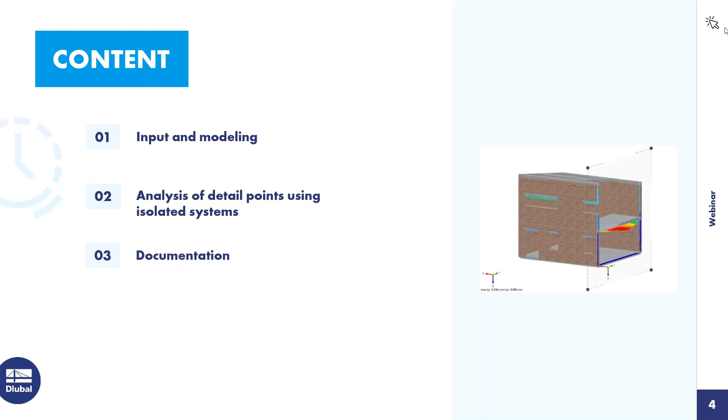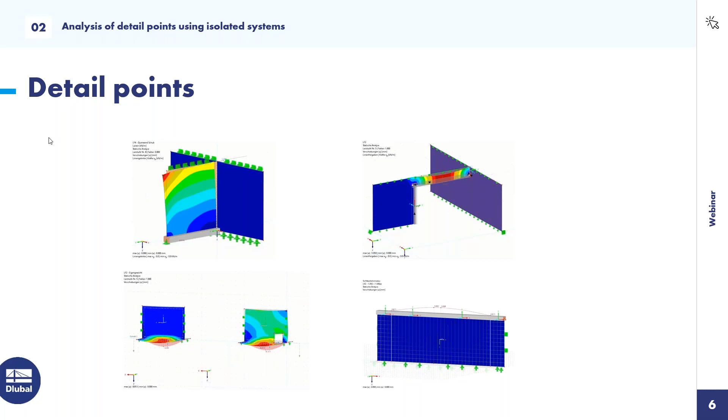Today I want to model a building from the beginning in RFEM. In the second part, I want to take a look at some detail points, especially connected to the masonry material. And in the last part, I want to show how you can document the results of the program. In the first part, we will insert a small building in RFEM, and I want to show you how to do it. In the second part, I have chosen some separate models where I have prepared things to take a look at some details. And as I said, the last part is the printout report.

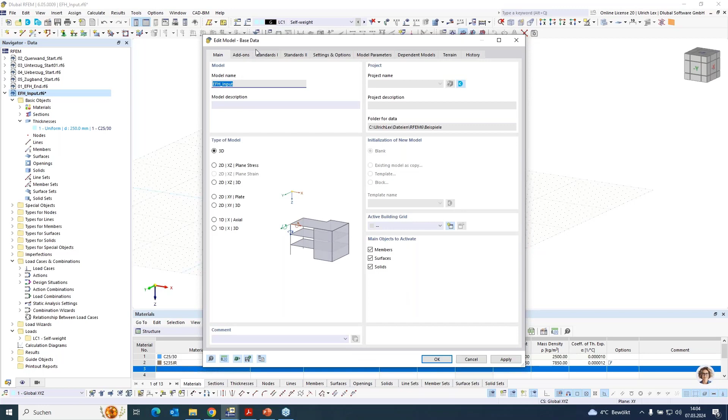So now I want to switch to the program. I have already created a new file, a new project in RFEM. It is important when you create a new project that when you want to use masonry, you check the add-on masonry. Otherwise, you cannot use the material model for masonry design.

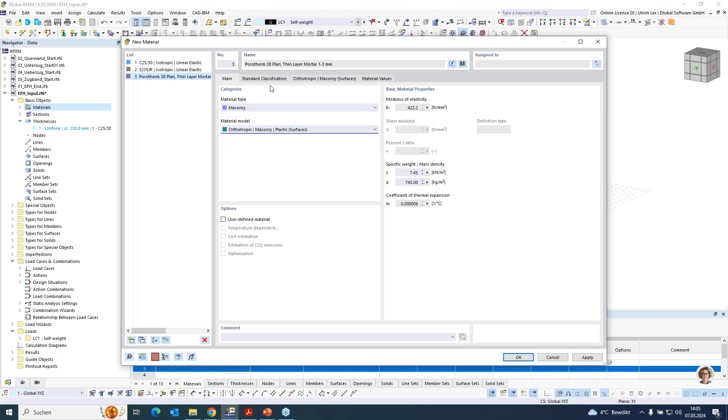So as a first part, I want to create a new material. You can use values from the database for material type masonry. Maybe you can choose one product you want, maybe Porotherm 38, and choose the material model, the orthotropic masonry plastic. If some products are not available in the database, you can also insert them manually.

In this tab, standard classification, you can choose the grouping of your product. You can choose the mortar you used. You have to insert the dimensions of the stone and the compressive strength. With all these values, RFEM automatically computes the data needed for the material model, such as the module of elasticity, the shear modulus, the allowable or ultimate compressive strength, or the ultimate tensile strength.

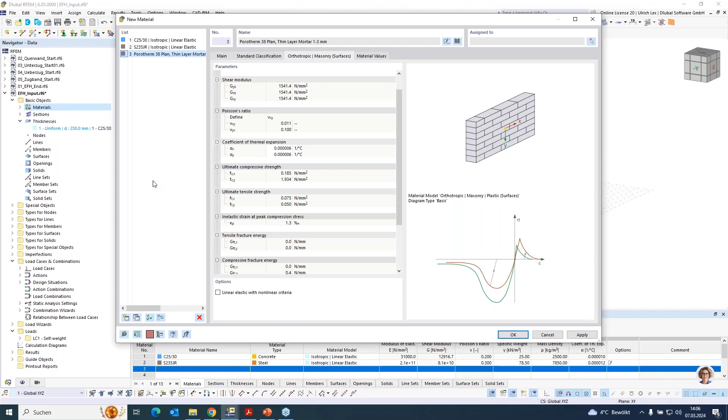So I want to create now a second material, maybe for the inner wall. It's the same as before - choose one product, maybe this Porotherm 17-50, and confirm with OK. The second thing I want to do is to create a thickness.

All surfaces need a thickness. The first thickness is already in, it's 250 millimeters with concrete for the foundation maybe. The second thickness I will create is 200 millimeters for the concrete slab. The third thickness uses our masonry material, 380 millimeters. And the fourth thickness uses the material for the inner walls with thickness 170 millimeters.

If I have done this, then I can start with the modeling. Here I have a building with the dimensions 7 by 9 meters. I use my grid points to create the first floor, 7 by 9 meters.

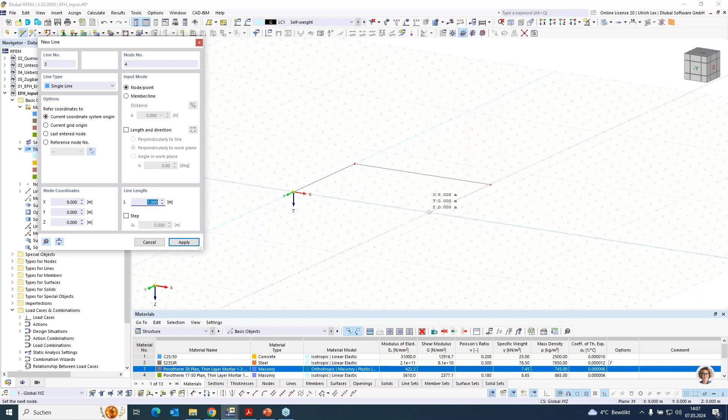I can here assign directly with this select boundary my foundation plate, thickness 250 millimeters concrete. Okay, and choose the lines.

So in the second part, I want to change my work plane and create a new surface. I want to choose now the thickness for the outer wall, with a height of 3 meters.

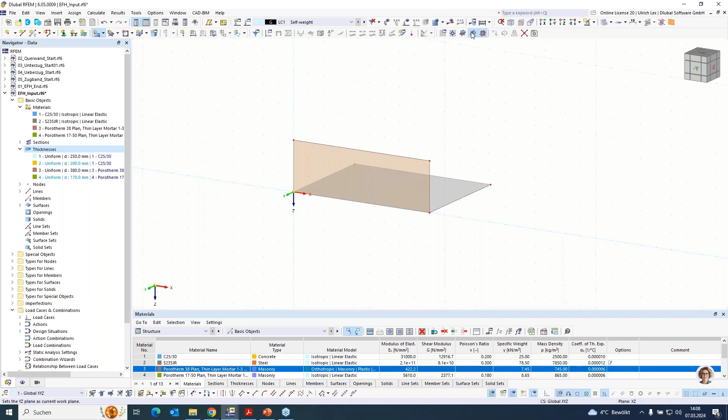I can change my work plane and create the second walls. Now I can directly copy these walls, and the first things are done.

Now I want to create the first concrete slab. Okay, and choose the outer lines.

So the second floor will be in the front a height of 4 meters, and in the back, a height of 3 meters.

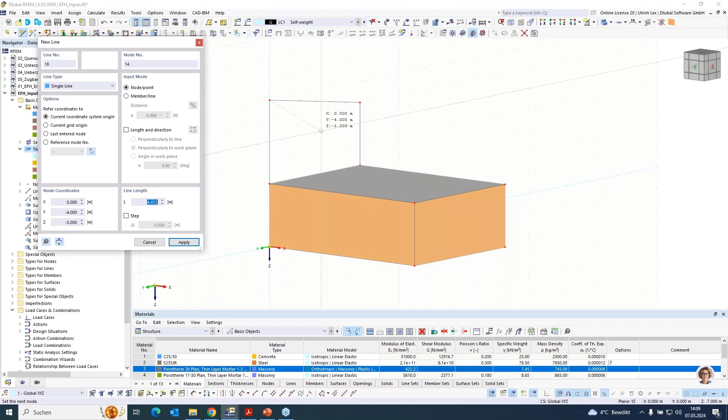As I did before, I can use select boundary with 360 millimeters, select and copy the surface, and at the end, the wall in the front and at the back.

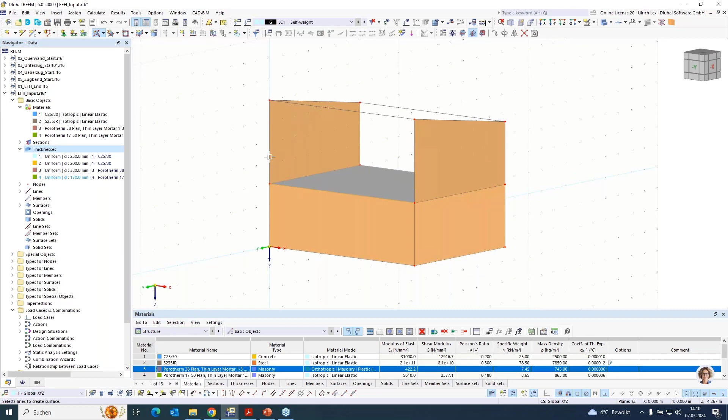Choose all these lines, turn around it, and choose the rest of the lines.

Okay, now I want to create my inner walls. There I select only the ground floor, and change my working plane.

And start to create the lines for the inner walls: 1, 2, 3, and 4 meters. My grid has a spacing of 1 meter, so I can use it directly for my modeling.

Change my working plane, and just copy the lines to these points.

So the second wall is in the second floor. I cancel my visibility mode, and create new lines here.

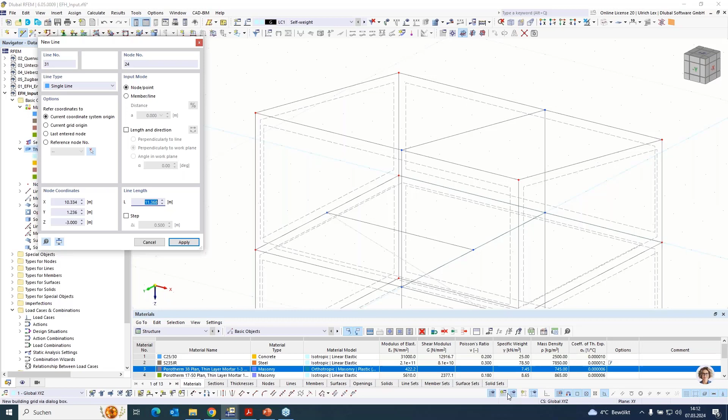Here you can see when I cross the line, then one point is caught automatically. This can be set in the detailed setting for catching the lines.

So now I have created all lines for the inner walls. Then I want to choose select boundary for creating a surface, choose my thickness from the inner walls - the material is automatically changed - and choose here my walls.

Here, and the third one. So now all my walls are created.

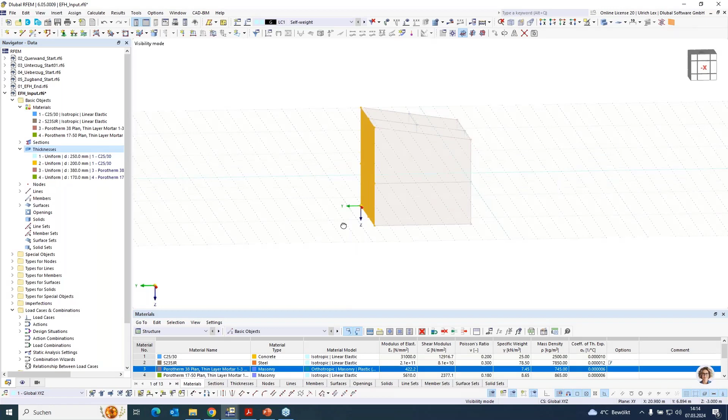As the next part, I want to create some openings like a window or a door. I select again my wall in the front, change my work plane in this plane I want to work, and change my grid point spacing, dividing the space 2 times.

Now I can use the option to create a new opening with 250 high and 150 width. I create a new window.

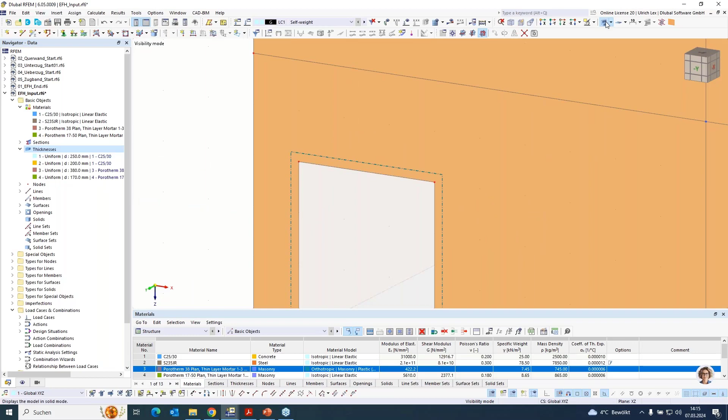Here it's one. I just want to change it to 2.50 meters, and create a window with 1 meter to 150.

The same maybe in this part, and the same in the second floor. Maybe a little bit bigger window, and the same here.

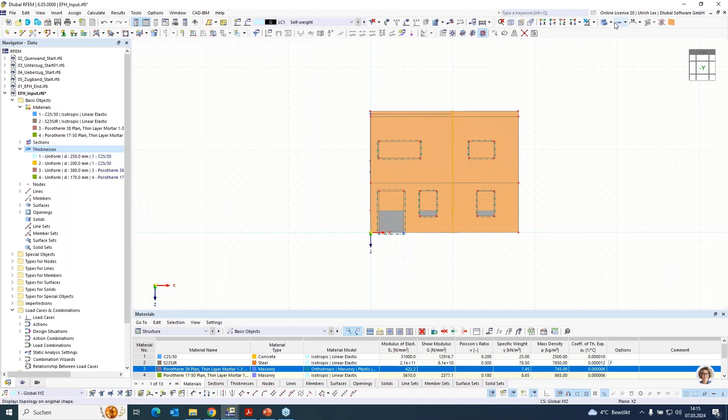In the inner wall, I want to have a door too. So I select my inner walls. I can switch off the background, the hidden objects, and for better modeling change my working plane and select the grid point.

And can create now here a big door.

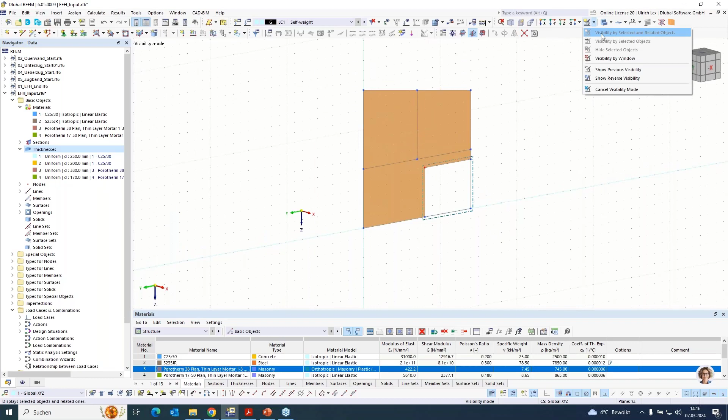So in case of using masonry material, it is important that for openings you create something like a lintel above. If you do not assign a lintel, the system could be unstable because of the missing tensile strength, or the missing, very small ultimate tensile strength in the area above the opening.

So that's why we create a lintel here now. I double click on the line, create a new member.

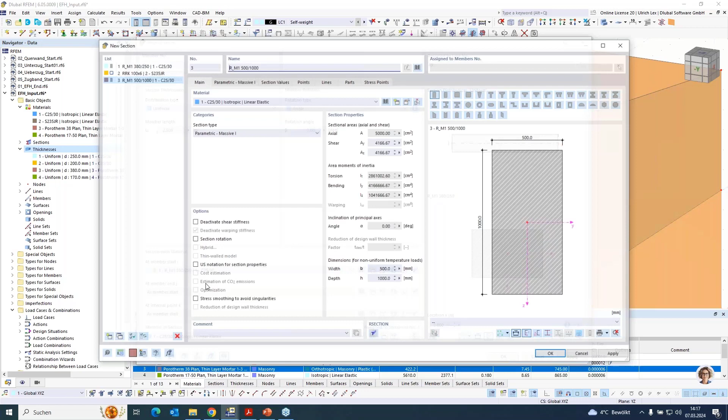It's a member type beam. I want to select a new section - I can create a new section - maybe with a width of 380 millimeters and a height of 150 millimeters. Material concrete is okay.

And the second thing is, when the window is too big, it is good to have this lintel a little bit inside the wall. This is because the force from the lintel should not directly insert into the masonry material at one FE node.

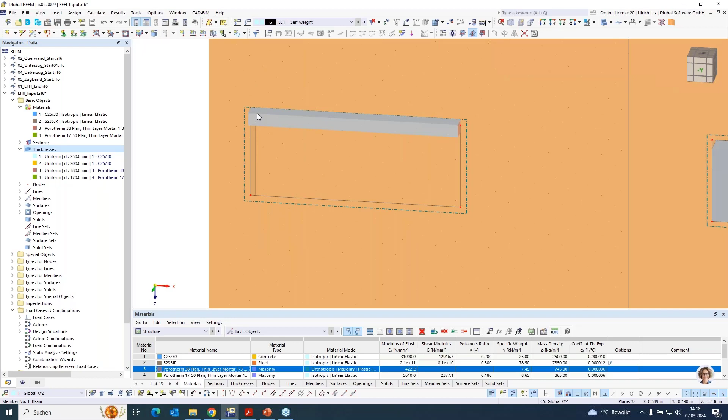So we create a copy of this node, create a copy in X direction, maybe 125 millimeters, and the same on the right side. And create here a line and a section too.

Okay, and okay. The same for the other openings. I select all these lines, double click, and assign a new member.

Okay, the same I will do in the inner wall. I assign a new member. Here I use a little bit bigger section, so I create a new one, maybe 170 millimeter width and 250 millimeters high.

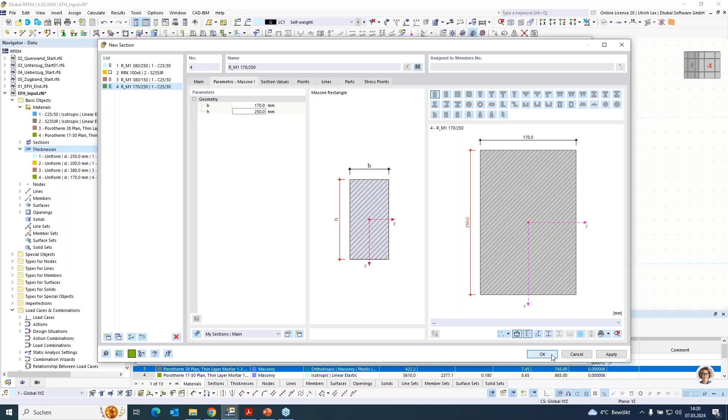Okay. Here I could create - I could let this lintel be in the masonry wall too. It would maybe be good in this place, but in this example I will cover that in the details.

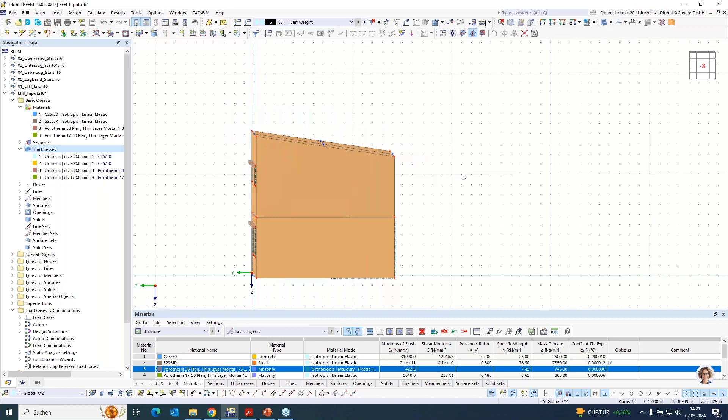So the next part on such a building is on the top of the masonry. We need something like a ring beam. You can create it easily in RFEM when you select all lines where you want to assign such a ring beam.

And can assign again one member, choose a section, create a new one, maybe 380 and 250.

Okay, and apply with OK. And then you have created this ring beam.

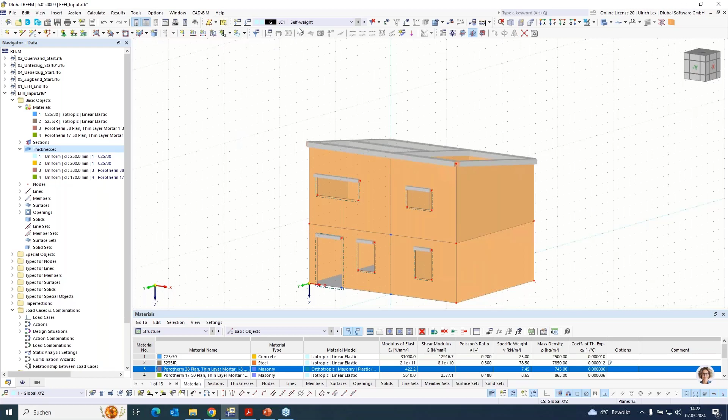So as a last part for modeling, you have to take a look on the wall slab connection. It's a very special thing for masonry buildings. Each time on a place where the masonry wall does not stand fully on maybe a concrete slab, you need a special connection. It's called in RFEM slab wall connection, and you can assign it if you double click on the surface and assign a new hinge. Create here a new line hinge, and here you will find the option slab wall connection.

As I said, it's to use each time where the masonry wall does not stand fully on the concrete slab. In case that the wall stands fully on the slab, then the material model itself can handle it. Only in case that the wall is not completely supported, then you need this hinge.

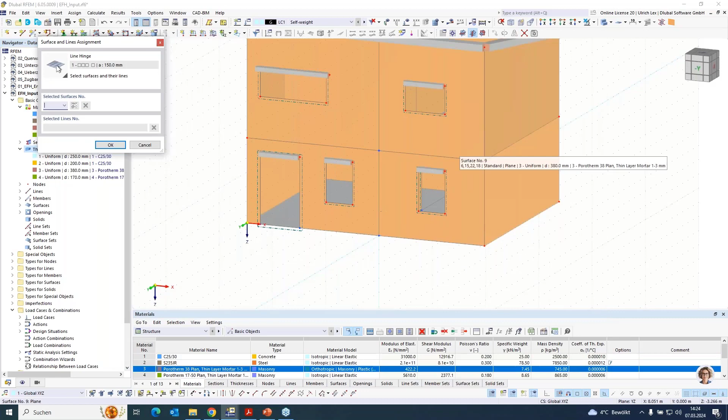So if you have checked on the option, you get the new tab with wall slab connection. Here you can insert the offset, maybe 150 millimeters. If you have a block width, then you can insert it. If not, then we let 0. We have to choose the lines where this hinge should be assigned. It's all the lines, all outer lines. Oh, just I had to go back one step.

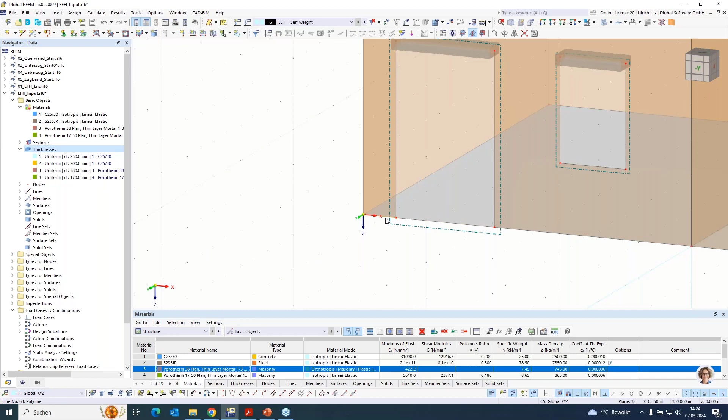I had at first to connect these lines and members, because here I have a double line, so I just use this option connect lines and nodes. So I will have no double lines and nodes in the system. Then I can assign this hinge again, create a new line hinge with slab wall connection with my offset 150 millimeters, and assign it to all these outer lines.

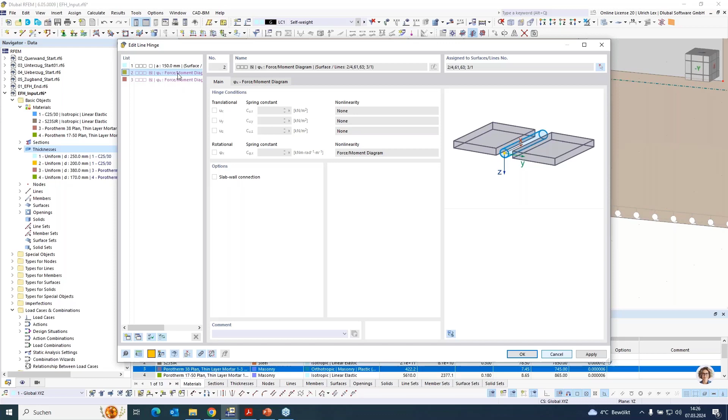Continue with OK. And now it's important to generate this line hinge with this button on the left. Now 2 line hinges are created. I can continue with OK, and I will see that my line hinge for the masonry wall is created. Here I can double click. It's yellow because it's created from the master line hinge, and here is a force moment diagram assigned.

Okay, the same I will do for the slab in the first floor. Double click on the surface, assign a hinge, create a new line hinge using slab wall connection. If I have the same offset, I could use the same hinge too, but now I generate a second one. Choose all outer lines. Continue with OK. Generate the lines. Continue with OK. And now I can see that for the wall above and the wall downside, two separate hinges are created.

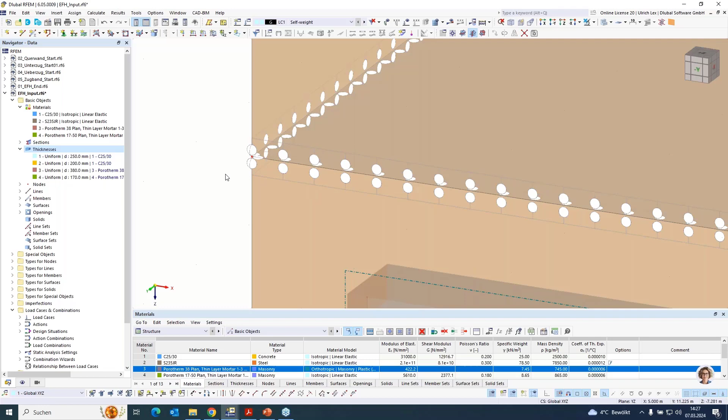Okay, as a next step, I had to choose a support. Here I want to choose a support of the base plate, support easily as a rigid plate.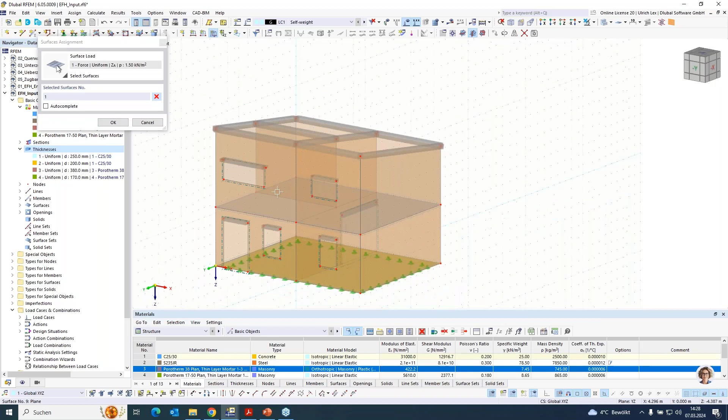Okay, and on the last step, I had to create some loads. The self-weight is created automatically. As a next step, I will create the live load, imposed load. Okay. Choose maybe for the self-weight 1.5 kilonewton and assign it to my slabs. Okay. And the same for the imposed load. Maybe 1.8. And continue with OK.

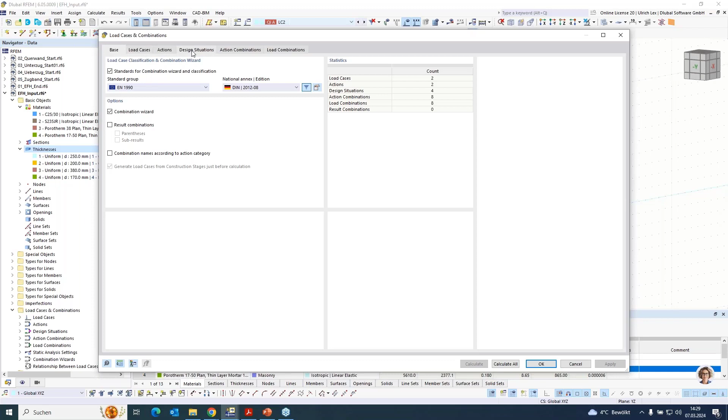The combinatorics is done automatically if you have set the combination wizard on. Then you can choose the design situations. You can create a combination wizard where you can choose a static analysis setting. For masonry, it's good to compute geometrically linear or large deformations. It's the best for the material model.

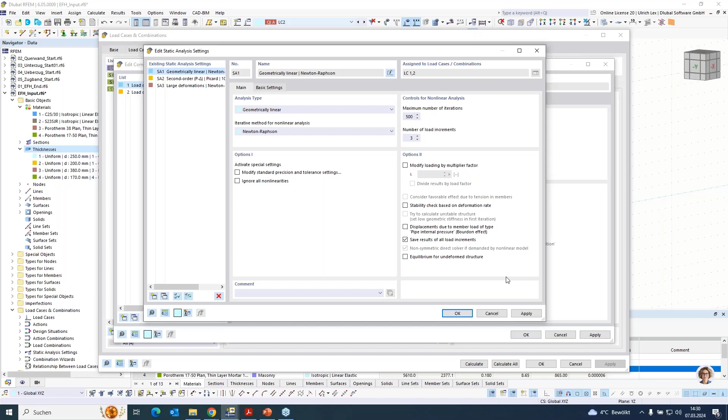And for the nonlinear plastic material, it's important to increase the number of load increments, maybe to 3. You can allow a little bit more iterations, and here you can save the results of all increments. Then you can take a look on the increment 1 or 2 too. Okay, continue with OK, and you get now the load combinations here.

So as a last step, we can take a look on the mesh settings. For masonry, we use normally something about 0.25, 0.2. You can OK and apply. Then the mesh will be created.

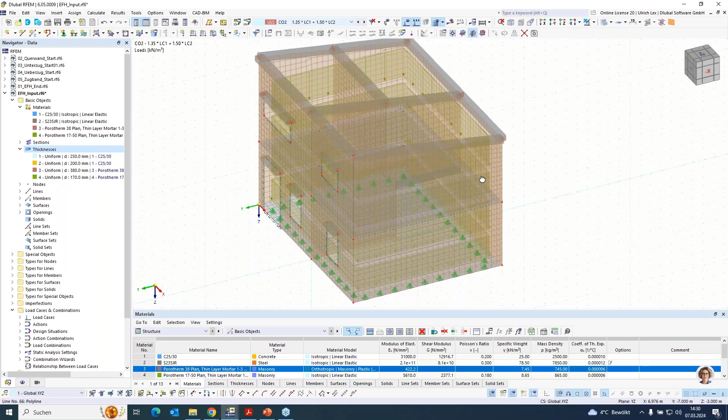Please be a little bit careful that you have a good mesh, because it's very important for the calculation, for the nonlinear calculation. So after that, we can compute the first load case, and when it's computed well, then we can go to the second part, to the details.

Here you can now see the calculation process where the system is computed with the first load increment, now the second, now the third, and then it should be finished. Exactly. Okay, now I want to switch to my detailed systems.

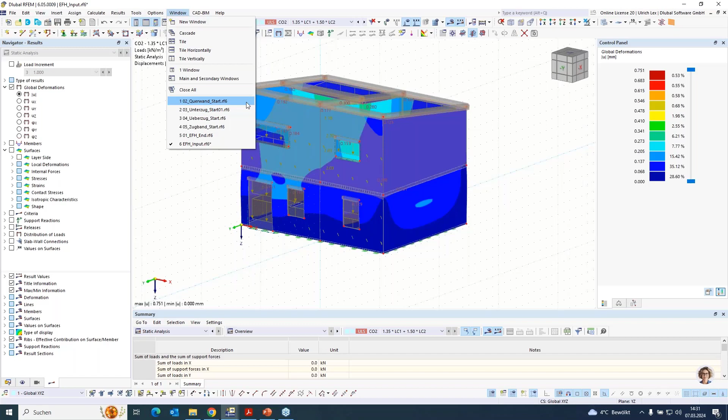And here the first one is a part of masonry where you have maybe some outer wall, exterior wall, and one interior wall. Mostly you have two different materials, maybe as I chose before, like a wall with 380 millimeters width, and for the inner wall, a different material with 170 millimeters. If you build up these walls, then generally the outer wall is created, and after that the inner wall will be created. So the connection between these walls is not rigid, I would say.

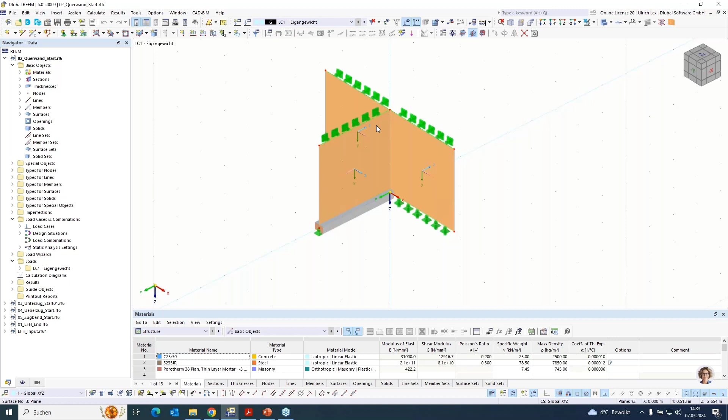Here are a lot of things you can use. One thing is you can use such a wall connector. I looked on the internet and found something like this. This is a wall connector. It is assigned in each row of the masonry stone and connects these both walls. But this wall connector cannot transfer shear loads, I would say. These connectors can only transfer tensile loads. So how can you consider this in RFEM? I want to show you now.

When I take a look in the data sheet, I will find that one connector can have a maximum tensile force of 0.5 kilonewton. It's assigned in each row. Then you have 0.5 divided by 0.25 from the height of my stone. Then I will have a force of 2 kilonewtons per meter in this edge. To create this, I can use the special object line release and create a new one here.

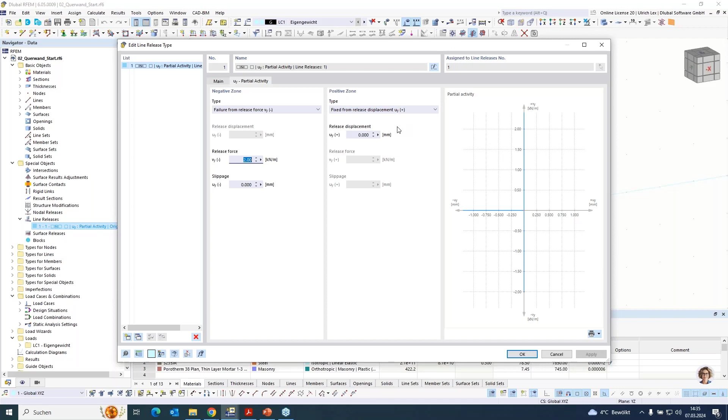As a release type, I can choose a partial activity in Y direction. And this partial activity could be that the connection is released from a force of 2 kilonewtons per meter. In the pressure direction, I would say it's fixed now, but here you can release it too. So this release I can assign to the surface. I can say my released objects are the surfaces. Continue with OK. Now the whole line is released.

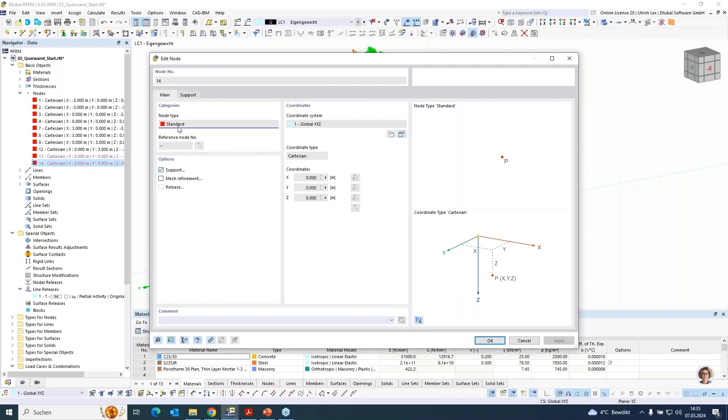That's why I have to assign a new support on node 14. This is this node. Otherwise my system will get unstable. Okay. So after that, I will create a new force, maybe a horizontal force of 5 kilonewtons in direction Y. Okay. And I want to compute this system. The mesh I set as before, about 250 millimeters. Here I increase the load increments so that I can show you the results better.

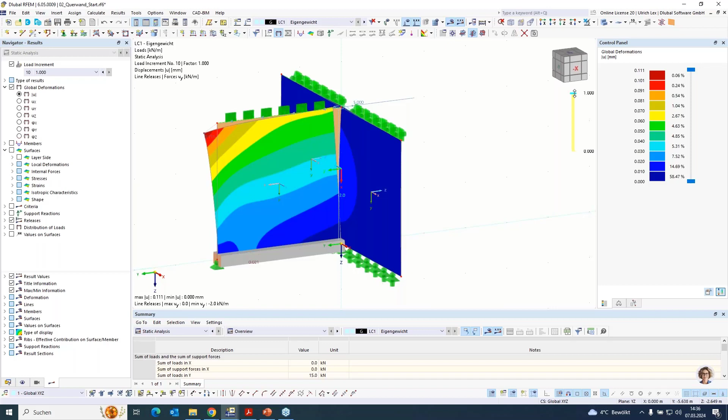So you can see that the inner wall is released from the outer wall. When I go some load steps back, maybe to the first one, we can see that the lines are connected. We only have a force of 1.4 kilonewtons. And when I increase the load, then you can see that the release of this inner wall is getting on.

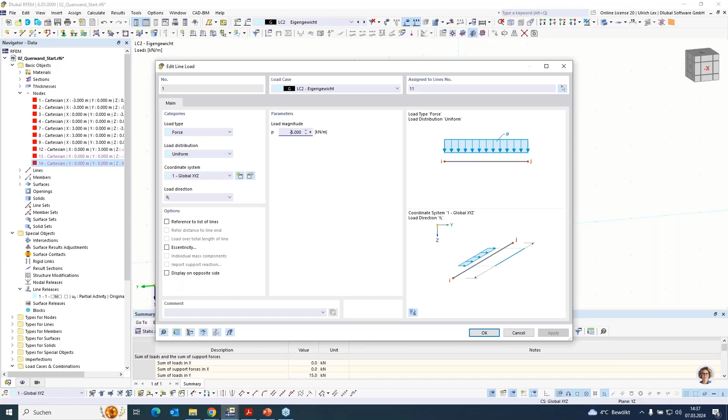As a test, we can create a second load case where I copy load 1 and change the direction of the load. And here it should now be connected to the outer wall. And this is exactly what we want to have.

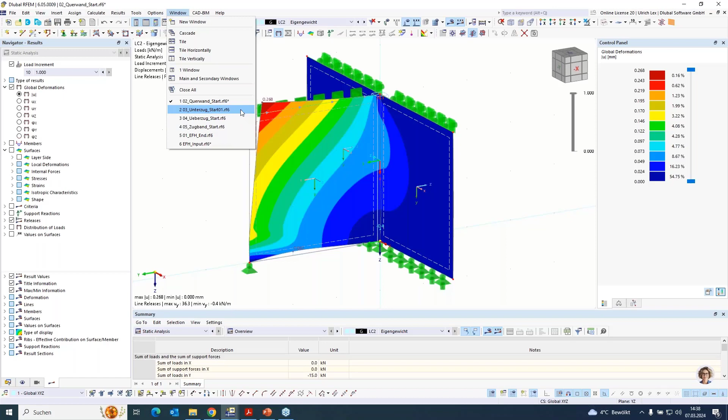Okay. As a next example, I want to show you my system with the lintel. Here I have the problem that the inner wall and the outer wall are, I would say, not connected. Only the force from the lintel should be reacting in this outer wall. So I can continue as before and create a new line release here. I assign it to this line. Okay.

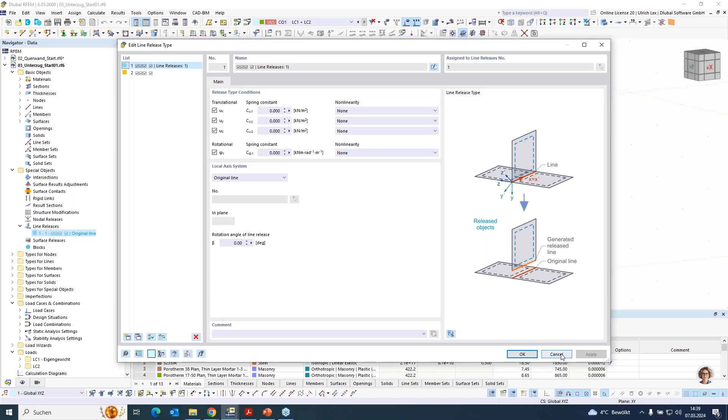Now I choose the release type fully, because I'm not sure if in this place a wall connector is really built. So on the safe side, I did not connect these two walls in this place. So I have to release the wall. And now I want the force from the lintel not to be released. It should be acting on this outer wall. That's why I can define this definition object, my node 4. So there is no release created, and the force is acting on the outer wall.

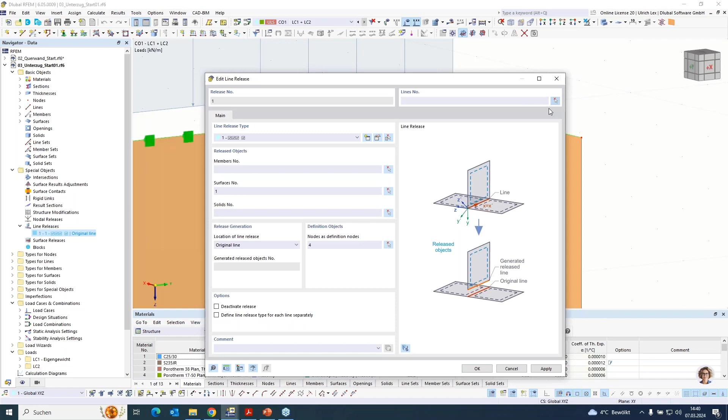Okay, continue with OK. And now I see on this one node no new node is created, and here a new node, a release node, is created. Okay, just take a look at the results.

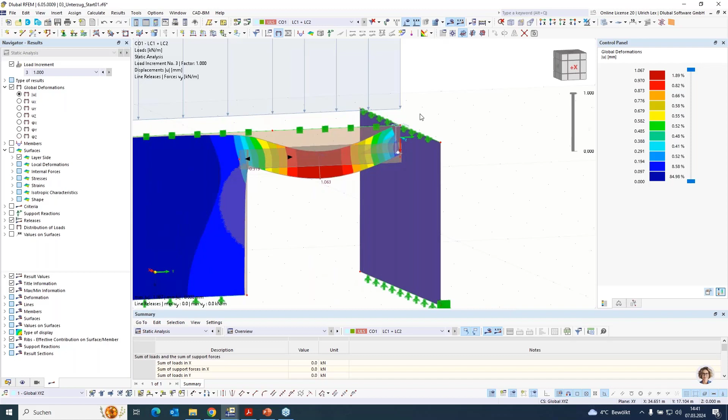And when I take a look at the deformations, I see that my masonry material is released, and my lintel force is acting on the outer wall. I can also see this when I take a look only at the outer wall. And here I see that the whole load from the lintel is acting on this one FE node.

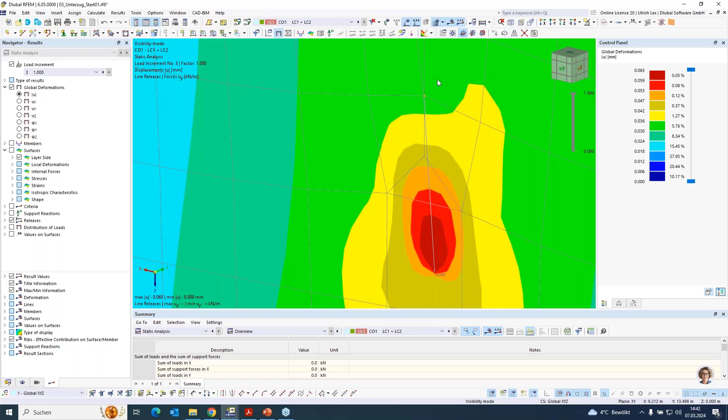Maybe this could also be a problem, that so much load is acting on one node. If this is a problem, then you have the possibility to copy this one node, and a second time in the other direction, and assign here a small beam, maybe a rigid beam.

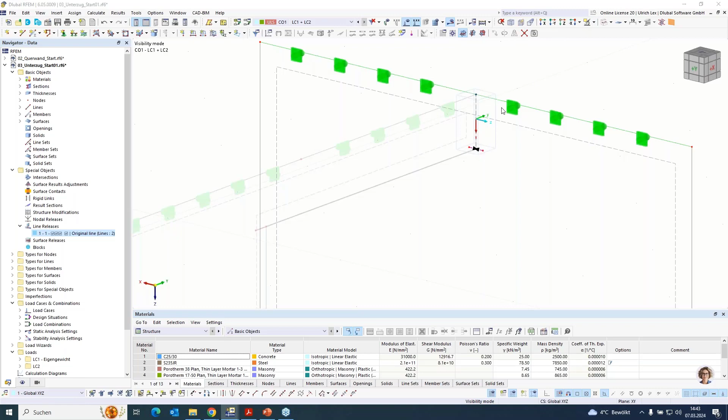A rigid beam so that the force is smoothed at this point. If you take a look at the results, it should be the same as before. Only the force in this node is a little bit smoothed. So this could avoid some problems if one point of the material is overloaded.

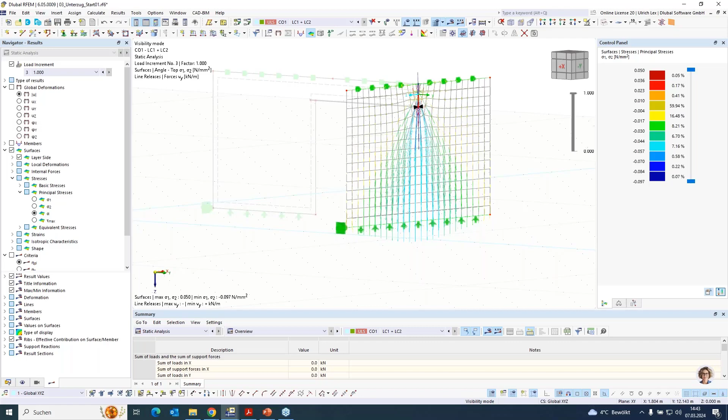So here you can see, when you take a look at these criteria, and maybe not the criteria, if you take a look at surfaces and the stresses on this alpha, you can see the load distribution in the wall, and you can see that we have, as is common for masonry, a distribution of maybe 60 degrees in the wall, and the same you can see in the support reaction where we have in this area this load from the lintel.

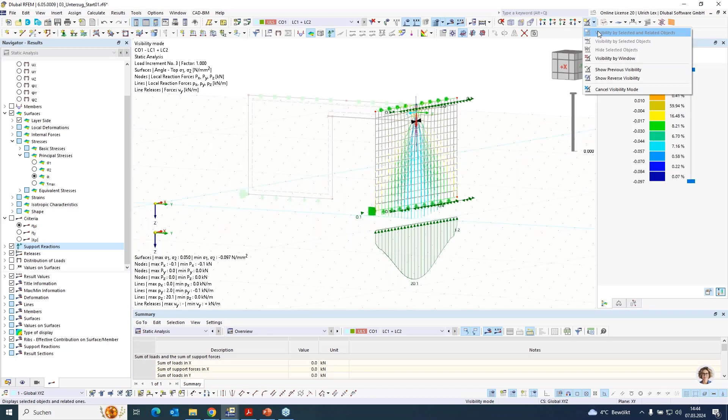Okay, on the second side, there could be problems too. When we have here a too big force from the lintel, depending on what is on the floors above, it could be that at this place a concrete column should be located, but this is also easy to do.

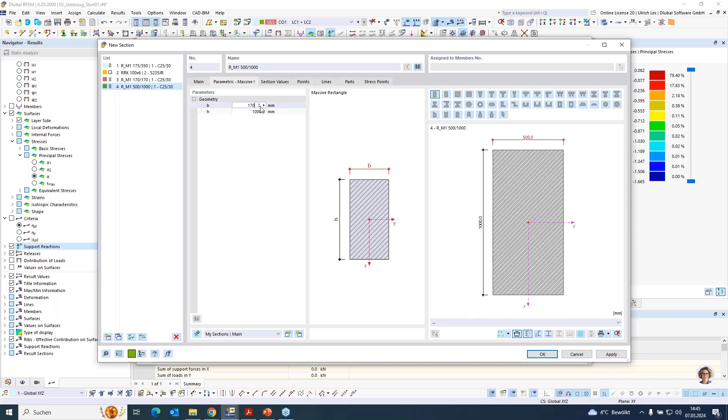When you double click on the line, you can create again a new member, as a beam, and create here a new section. Maybe 170 to 170, as a concrete column.

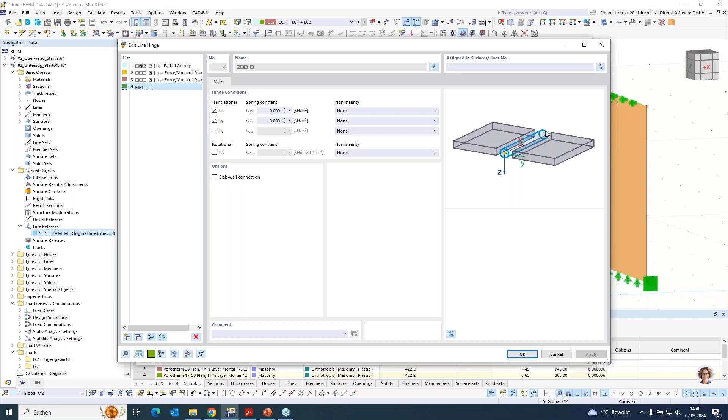So one thing you have to think about is that the masonry wall is now connected fully with the concrete column. Here you can insert again something like a new line hinge, and maybe let it free in X direction, so that no shear force is between the concrete column and the masonry wall. Okay.

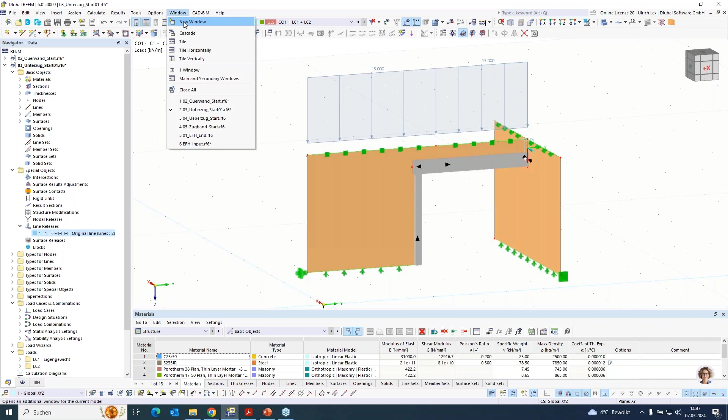Okay, so these were the problems of this example, and now I can take a look at the next example. When you have something like a wall above a concrete slab, where you have no support in the floor below, then when you take a look at the results, you will see that the masonry wall is acting similar to a beam. You will have some forces like a pressure arc in the masonry wall.

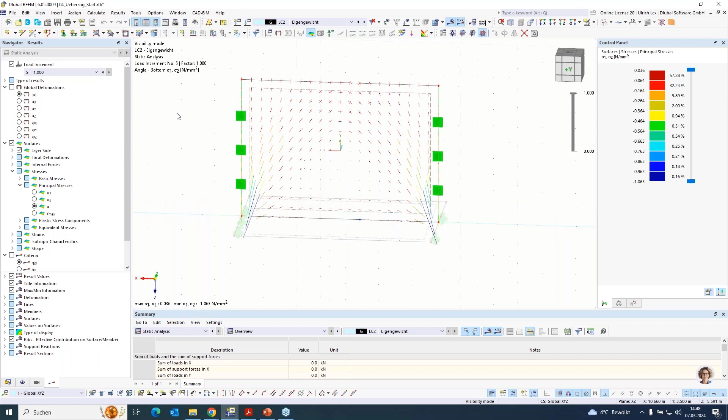Normally we only have to know it, because when an opening should be created here afterwards, then this pressure arc is destroyed and the behavior of the wall is different, and therefore you may need more reinforcement in the concrete slab. I want to show it now.

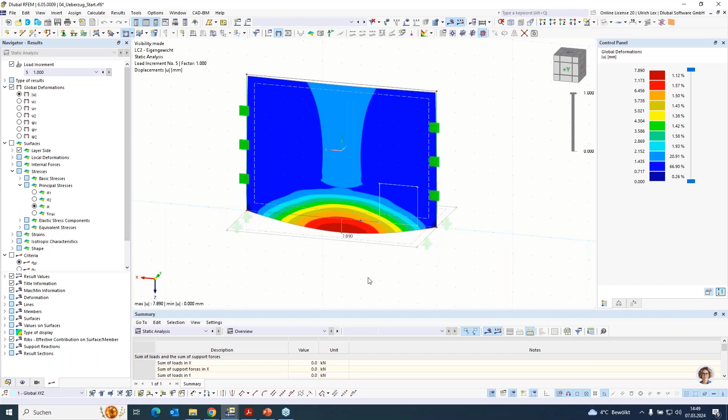When we take a look at the deformations here, we have 7.9 millimeters. When I now create an opening, maybe for the heating or something else from the house technique, then you will see that the deformation of the wall is increasing a little bit. Therefore, you need more reinforcement in the concrete slab, and you have to consider it in your static model.

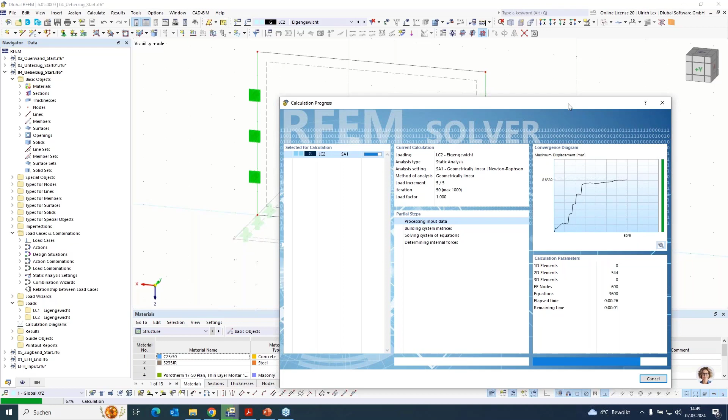So the last example is one from the roof, from the top floor. Sometimes you have to consider some wind loads, tension loads from the ring beam, and have to anchor this in the concrete slab.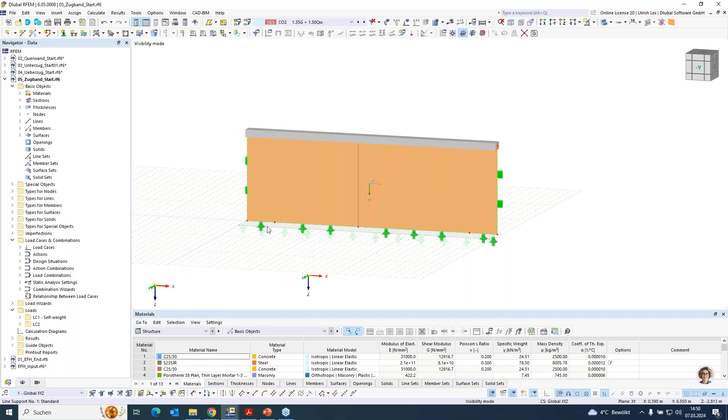This you can do easily when you create a new beam. You can use the tension beam here, and you can insert this tension beam into the surfaces, maybe like this, and tension, and like here.

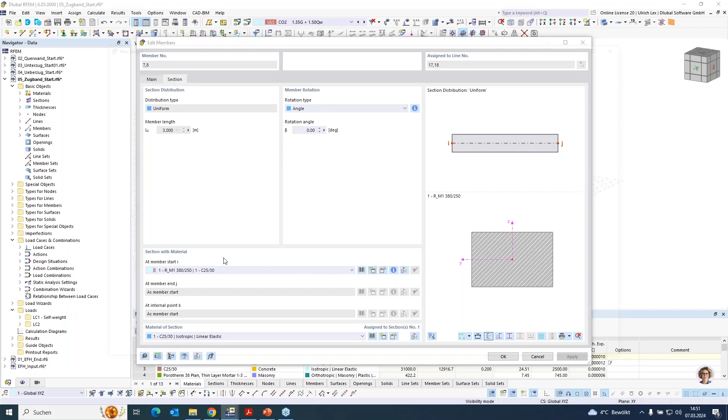Here I want to change the section. I can create a new section. I have already created a section of 12 millimeters.

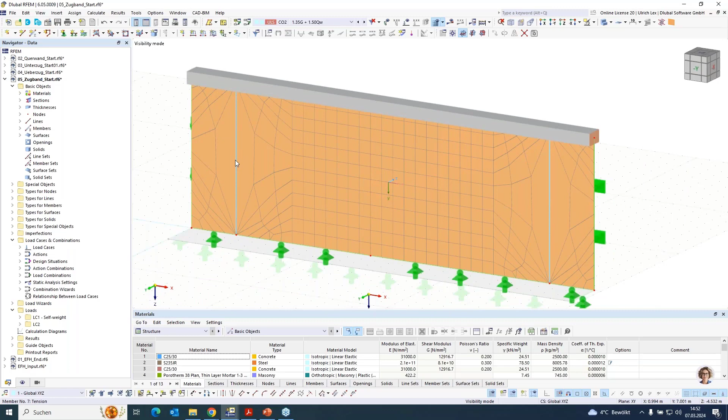Okay, as a tension. But now when you create the mesh, please be careful, because you are using now a tension beam, and the tension beam is not meshed, it's only meshed on the end points. And here it's generated or integrated to the surface.

Therefore, we have to double click on the surface, go to the tab integrated, take off the automatic detection, and take off these two lines. Therefore, only line number 5 is integrated. Continue with OK. And this means that this beam now has no connection to the surface. Now when you create a new mesh, then everything is okay again.

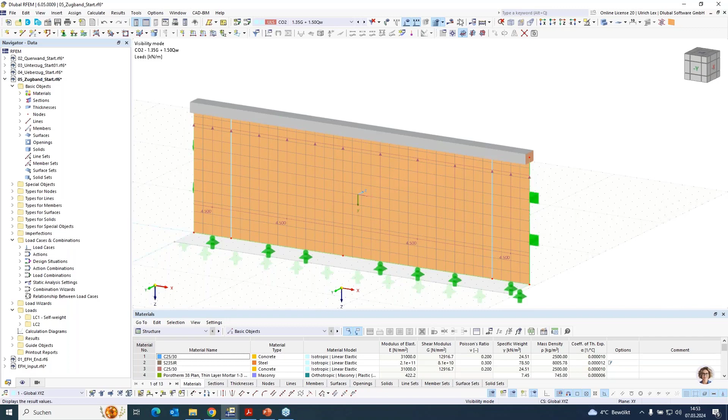I have created a load like tension in this direction. When I now compute it, you will see that the force is acting in the beams. Or not. Where is my mistake? Just one moment.

Somewhere I have made a mistake, but I want to switch to my second file. So here you now see that the load is acting on the tension beams and not on the wall.

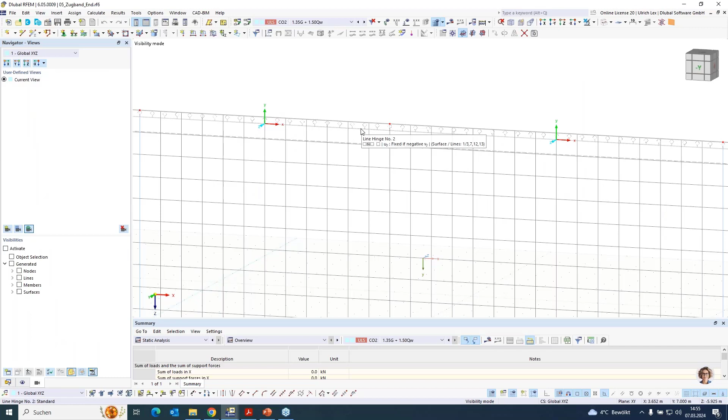So that it is not acting on the wall, you had to additionally assign a line hinge so that the ring beam is not connected to the masonry wall. Here I created a new hinge with the non-linearity that it is fixed if the force is negative, and that means if the force is tension, then it is free, and if compression, then it is fixed.

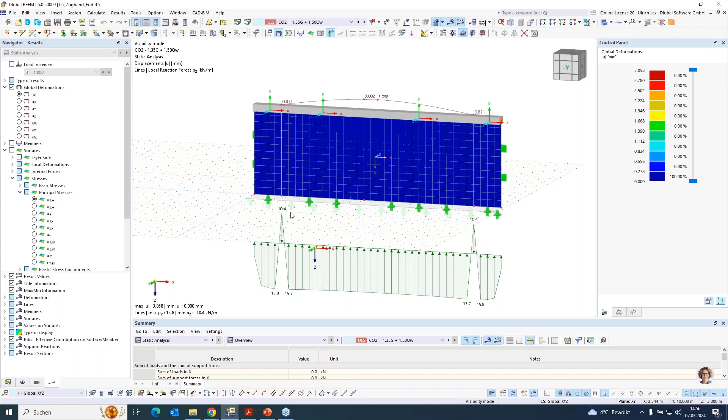Okay. And here you can see that in the wall there are no loads from the wind suction. It's only in the concrete slab. Okay, on this part I want to switch to the third part and go back to my building we created before. For the documentation, you can use all things that we have in RFEM available.

The most important thing is, I think, the stresses. You can take a look at these strains, because when the strains are too big, it is a hint that cracks are existing in the masonry. I showed it in a webinar before, where on the slab, this sliding slab on the edges, there are cracks here.

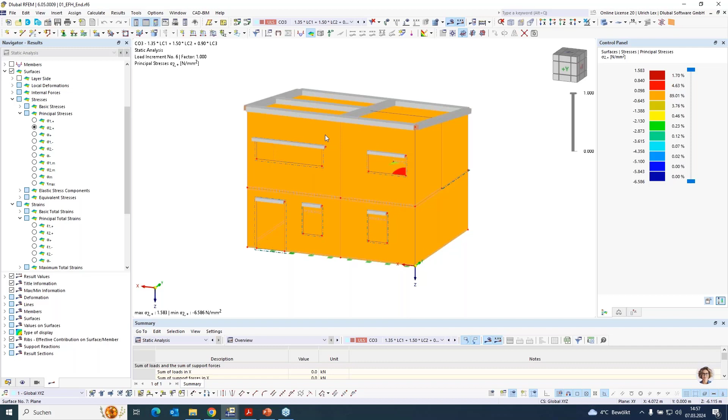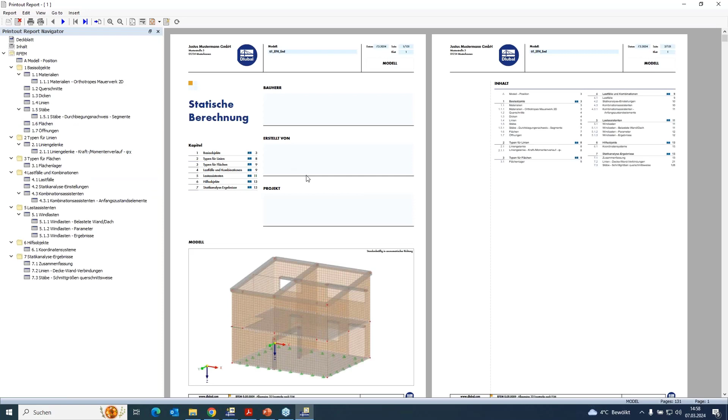And of course, we have the printout report. If I open the printout report, you have a lot of tables, a lot of things implemented. All things that you have inside, and you have also documented the things from your material,

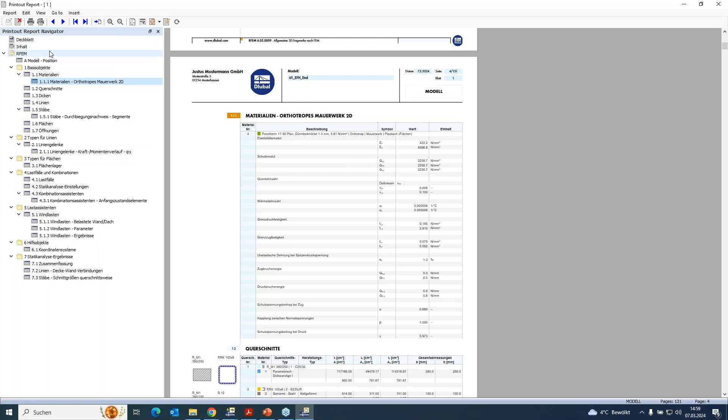I just want to switch the language. You have also documented the material properties from your masonry. It likes... just set the language to English. And open it again.

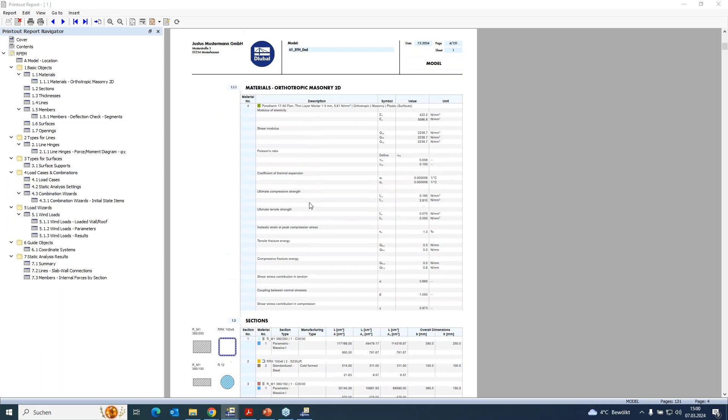So now it's okay. Here you can see the ultimate properties from your material that you have used for calculation. So a design check for the material does not exist because of the calculation. It's a plastic calculation, so we cannot give any ratio. It's only when the calculation is fully done, then the ultimate strength is okay. And this is the design check, the only design check that we have.